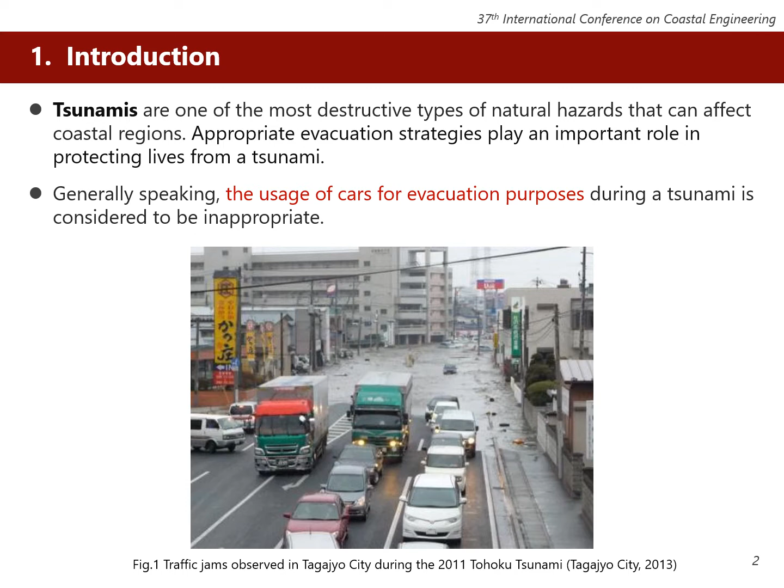However, evacuation by vehicle could be helpful for someone, especially for someone who cannot walk fast, such as disabled, elderly, or infants. In fact, after the 2011 Tohoku tsunami, car use for evacuation has started to be partially accepted in Japan. It is thus important now for residents and city planners to develop an effective evacuation plan by considering the use of vehicles.

Essentially, it is important to know beforehand what percentage of evacuees are allowed to use cars for evacuation. In order to know such information, evacuation simulation modeling, which can simulate human evacuation behavior, is a helpful tool. However, few simulation models can accurately reproduce the evacuation behavior of both pedestrians and vehicles, as well as the tsunami inundation process.

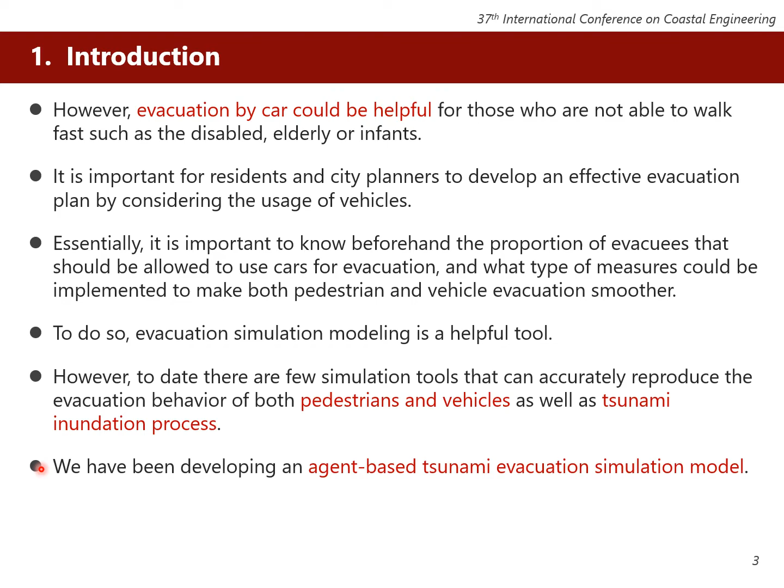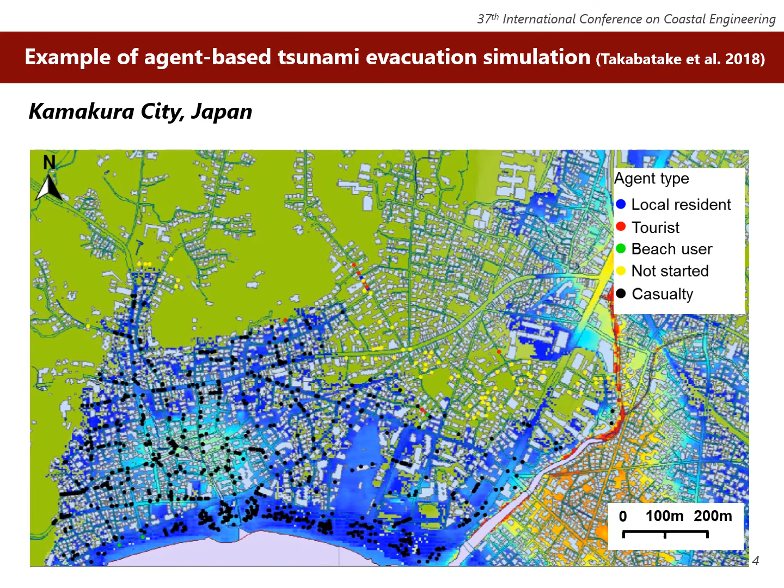We, Waseda University, have also been developing an agent-based tsunami evacuation simulation model. So here is the example of our previous evacuation simulation results. Each dot represents each evacuee. If evacuees do not start evacuation or cannot reach an evacuation place before the tsunami comes, they become casualties. However, our previous model doesn't consider the effects of car evacuation behavior in detail.

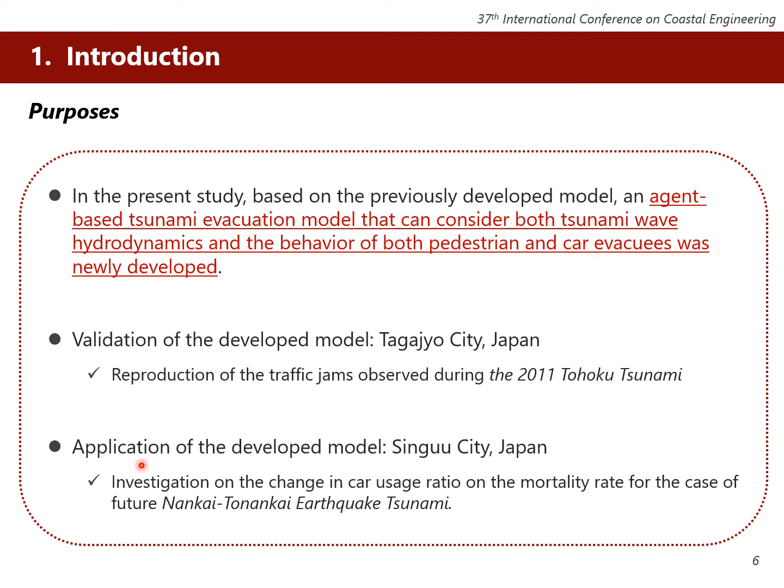Thus, in the present study, we developed an agent-based tsunami evacuation model that can consider both tsunami wave hydrodynamics and the behavior of both pedestrian and car evacuees. The developed model was first validated by reproducing the traffic jams actually observed during the 2011 Tohoku tsunami. Then, the developed model was applied to another coastal city in Japan. We investigated how the change in car usage ratio will influence the mortality rate of a future tsunami.

So, let me explain our agent-based tsunami evacuation simulation model. First, modeling pedestrian evacuees. Pedestrian evacuees are assumed to go to the closest evacuation place via the shortest route, as they should know the area very well. The moving speed of pedestrians was defined by considering both age and crowd density, as shown in this figure. So, when there are many evacuees on a road, the moving speed of pedestrians was defined to be decreased. Also, the presence of vehicles was defined to influence the moving speed of pedestrian evacuees.

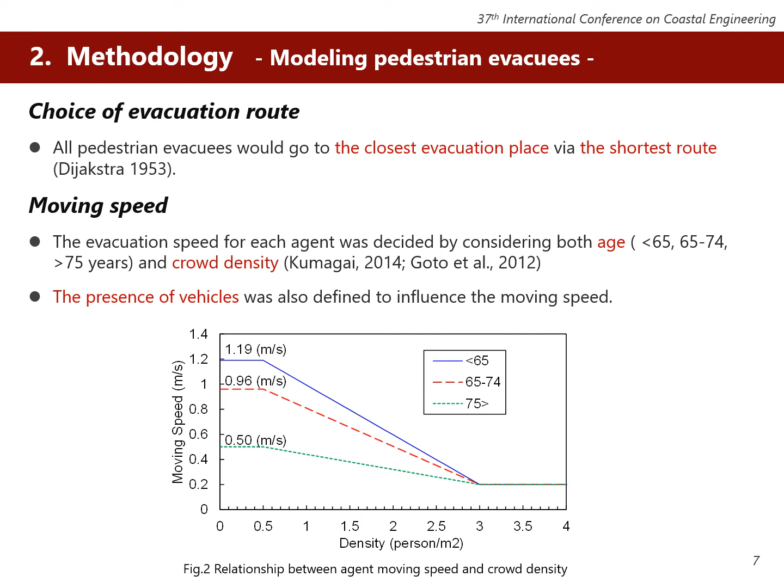So next, modeling car evacuees. In previous tsunami events, it has been reported that evacuees who use a motorbike or car were more likely to choose the main wider road instead of the shortest route along minor roads. We express this tendency, the tendency of car evacuees to choose main wider roads, by considering three different parameters.

The normal approach used to calculate the shortest route uses the length of each road. However, the approach we took here uses cost instead of the original length of each road, and the cost is calculated by considering the reduction factor. And this reduction factor is calculated by considering the minimum preferred width and level of preference, three different parameters. So essentially, in the model, if the level of preference is set to be low, car evacuees are defined to use wider roads more frequently.

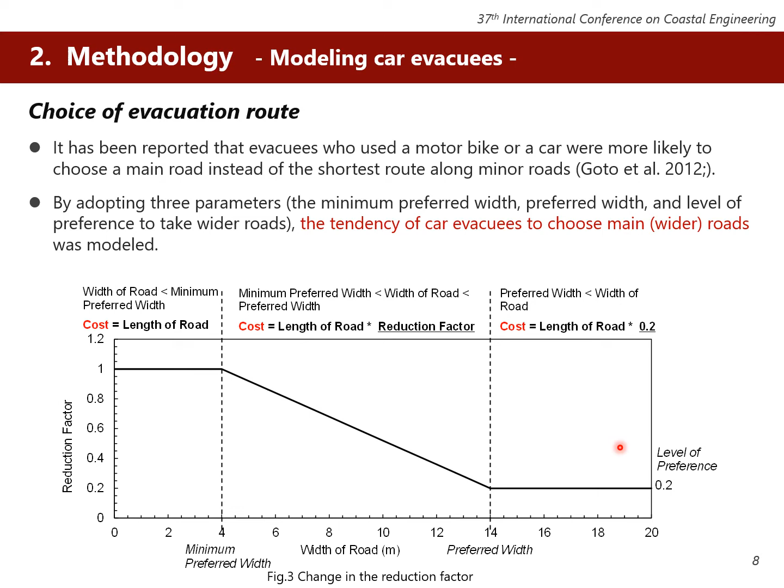The moving speed of car evacuees was defined by considering the road width and the interaction between itself and vehicle in front. Essentially, we use the intelligent driver model, which is widely used in the field of transportation.

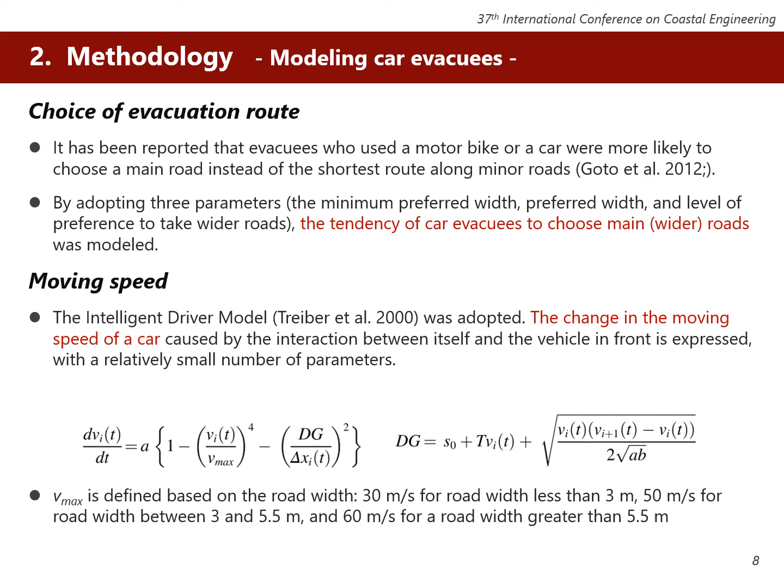The evacuation model is coupled with a tsunami propagation and inundation simulation model. The tsunami simulation model used in the present study is based on nonlinear shallow water equations. By using the simulated depth velocity product, it is possible to estimate the number of casualties resulting from a tsunami.

The simulated inundation area is also used to influence the evacuation behavior of evacuees. More specifically, in the model, when the road which an evacuee would take is inundated, the evacuee is assumed to avoid it and take a route leading to higher ground.

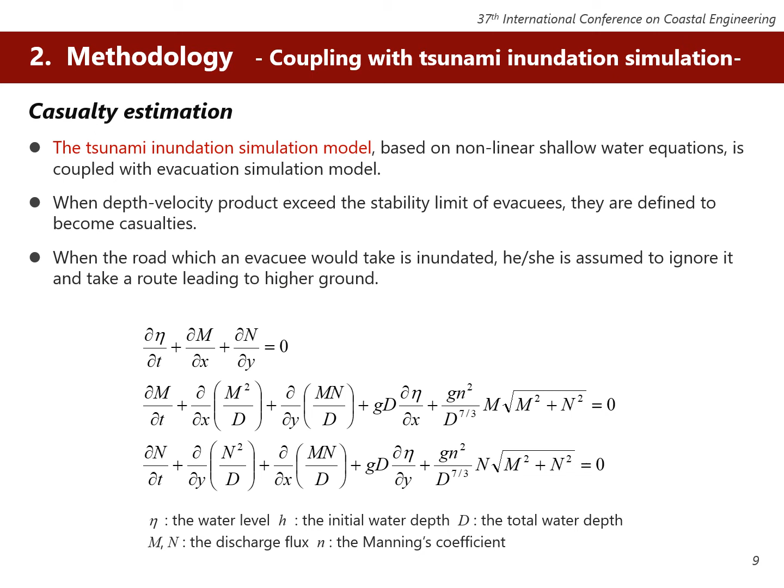So, in order to validate the developed model, we apply the model to Tagajyo City, Miyagi Prefecture, Japan. This city was hit by the 2011 Tohoku tsunami, and this city is known to be the area where heavy traffic congestion occurred along the main roads. In fact, many cars were caught by flooding, and more than 180 people perished in this Tagajyo City.

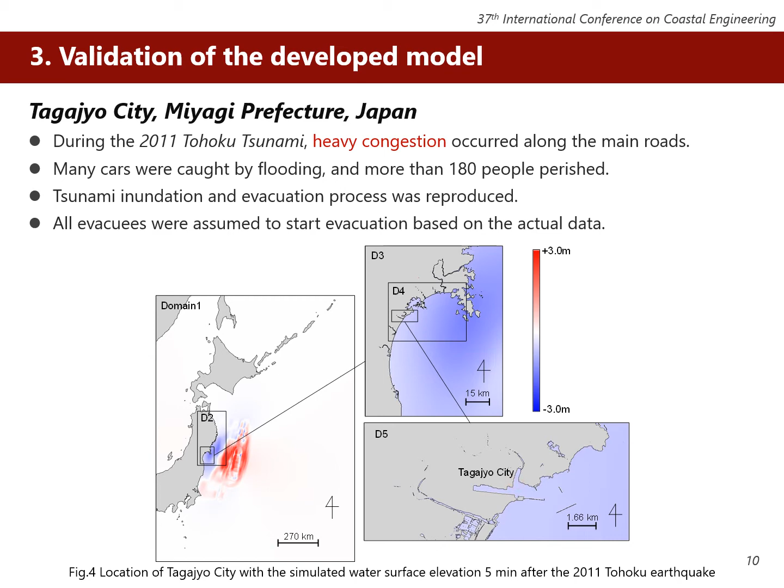By using the model, we tried to reproduce tsunami inundation and evacuation process. This figure shows the location of Tagajyo City and the simulated water surface elevation 5 minutes after the 2011 Tohoku earthquake. Let me show you the result of evacuation simulation. In the simulations, we changed the three parameters related to route choice of evacuees: minimum preferred width, level of preference to take wider roads. We changed these three parameters and tried to reproduce the traffic jams actually observed during the 2011 Tohoku tsunami very well. This shows one example.

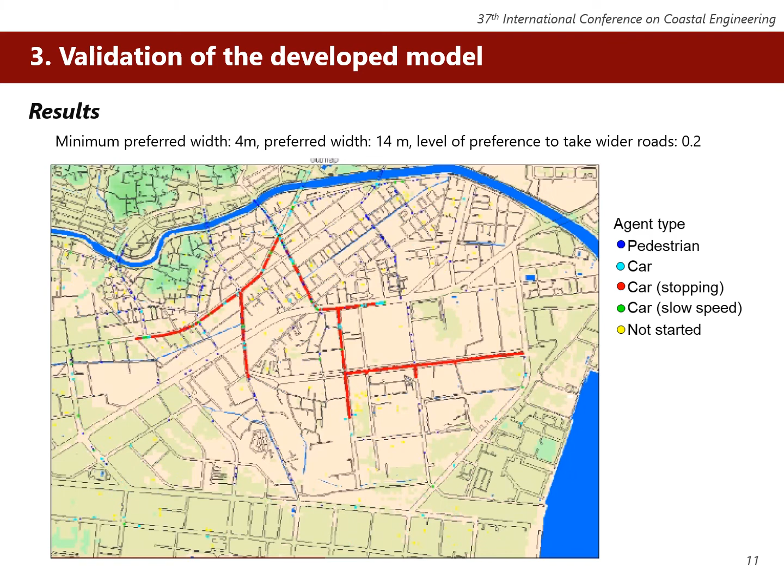In the video, the red colors show the cars which stop moving. As you can see, many cars stop along the main road. This means that severe congestion occurs along the main roads. So the simulated traffic jams were compared with traffic jams actually observed during the 2011 Tohoku tsunami. In the present study, we use the testimonies from the survivors in order to get the location of traffic jams. So let me show you some examples.

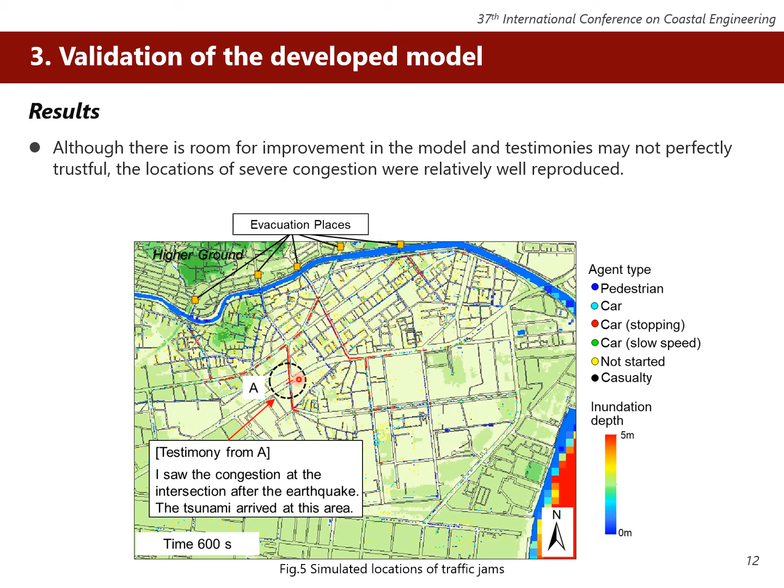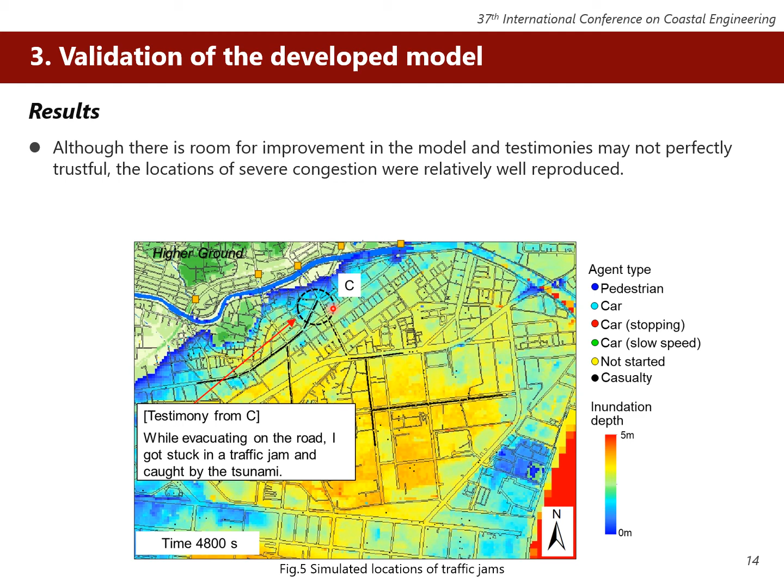Survivor C reported that while evacuating on the road, I got stuck in traffic jam and caught by the tsunami. Again, our simulation model successfully reproduced the traffic jam here and the cars caught by the tsunami here. Of course, the testimony from survivors may not be perfectly trustful, and we acknowledge there is room for improvement in the model. However, overall, we think the location of severe congestion were relatively well reproduced by the developed model.

Then, the model was applied to another coastal city in Japan. The city is Shinguu City. It is predicted that this city would suffer from a tsunami within 30 minutes after the earthquake for the case of future Nankai Trough earthquake and tsunami. And in the city, more than 35% of residents are over 65 years old. We investigated how the changes in car usage ratio would influence the changes in mortality rate. In the simulations, we assumed that all evacuees will start evacuation 5 minutes after the earthquake.

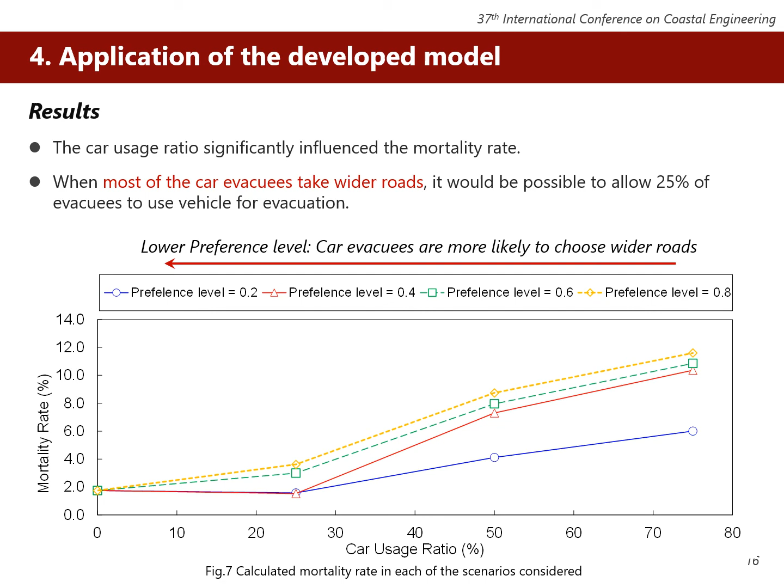What we can say from the result is, first, as expected, the car usage ratio significantly influenced the mortality rate. Second is, in the study area, where most of the car evacuees take wider roads, it will be possible to allow 25% of evacuees to use vehicle for evacuation. In fact, when preference level is 0.2 or 0.4, 25% car usage ratio shows minimum mortality rate in the present study area. So let me conclude.

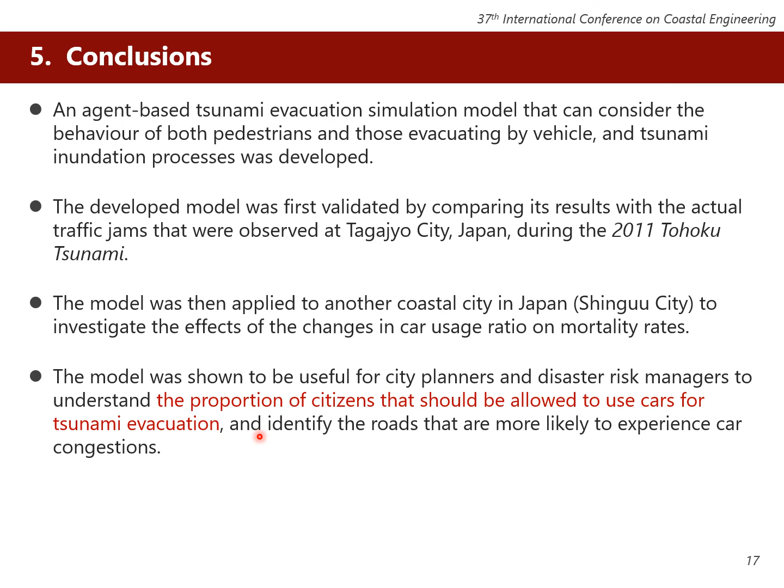In the present study, we developed an agent-based tsunami evacuation simulation model that can consider the behavior of pedestrian and car evacuees and tsunami inundation process. The developed model was first validated and then applied to the coastal city in Japan. We investigated the effects of the changes in car usage ratio on mortality rate. As a result, the model was shown to be useful for city planners and disaster risk managers to understand the proportion of citizens that should be allowed to use car for tsunami evacuation. We also believe that the model can be used to identify the roads that are more likely to experience car congestions. Thank you very much for listening to our presentation.